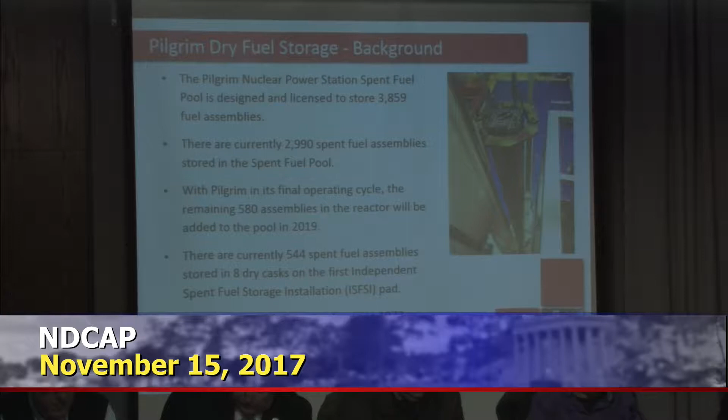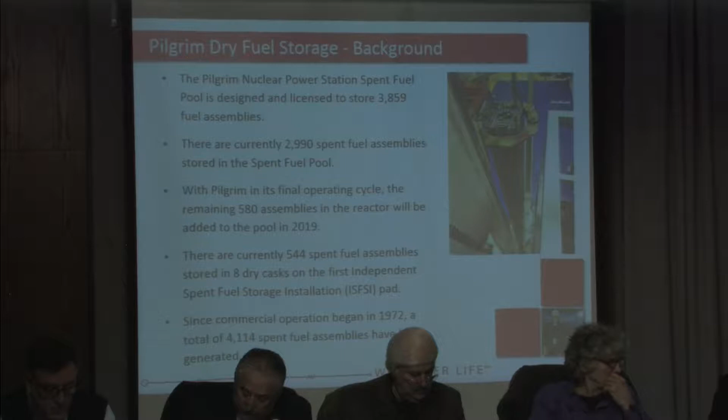We currently have 2,990 assemblies stored in the spent fuel pool, and about 580 assemblies right now in the reactor, which is operating in our last cycle. When we complete that cycle on or about the end of May 2019, we'll be adding another 580 fuel assemblies to the spent fuel pool.

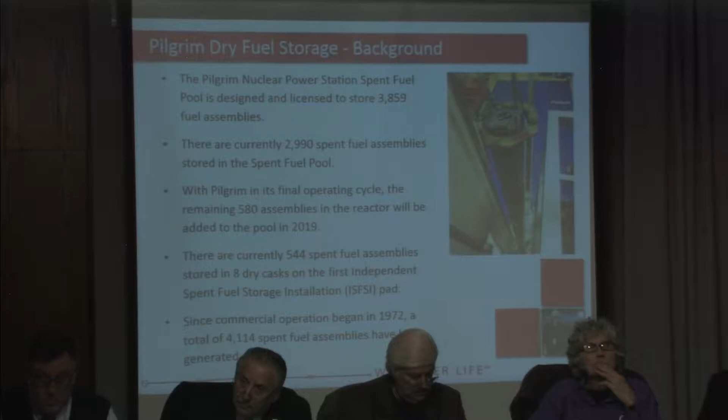Right now we have 544 spent fuel assemblies stored in 8 dry casks on the first of what will be 2 independent spent fuel storage installation pads. Since 1972, when we went commercial and started operating the plant, a total of 4,114 fuel assemblies would have been generated.

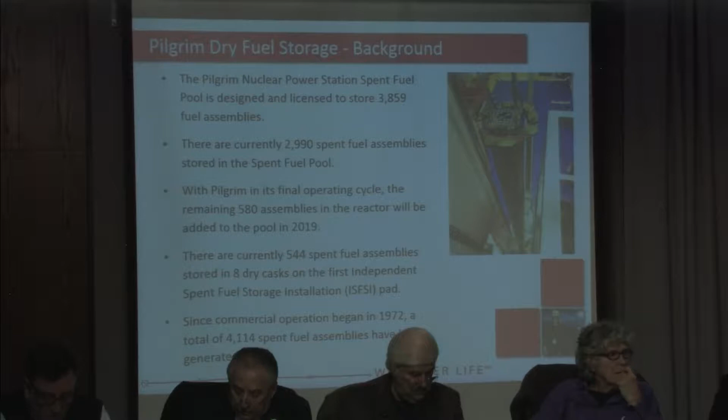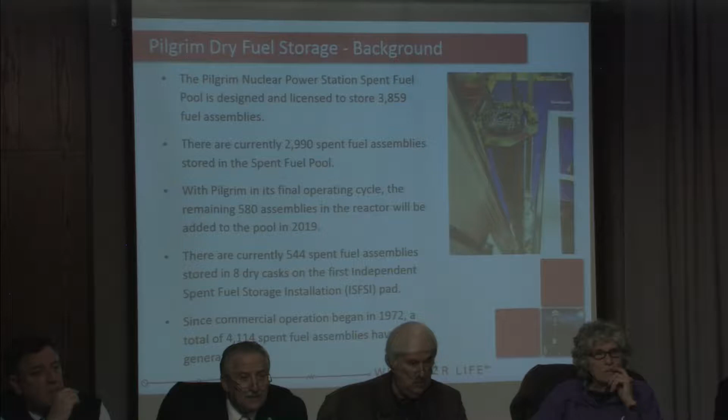Hold on one second. Justin, if you could hear me, can we get the other screen to go down? Or Kevin, maybe you can just try pulling and see if it works. I'm not sure it's on. Yeah, I don't know where that is. Can we do that one too? I was going to say, Kevin, you were going to have to sit on it. Go ahead, Joe. Thank you.

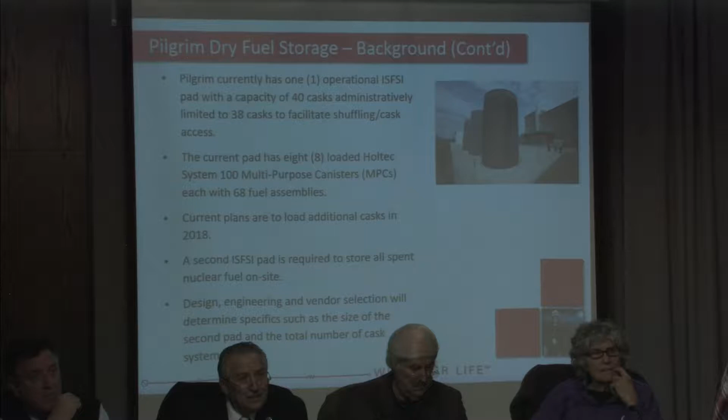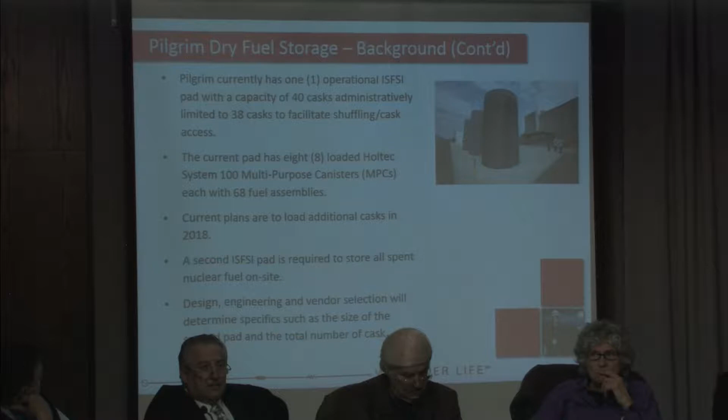Continuing with background information, as I mentioned, we currently have one operational ISFSI pad with a 40-cask design capability, but we'll administratively limit that to 38 because, as I mentioned at the last meeting, we need the ability to shuffle these around a bit to do inspections and things like that. The one pad we have constructed does have the 8 casks.

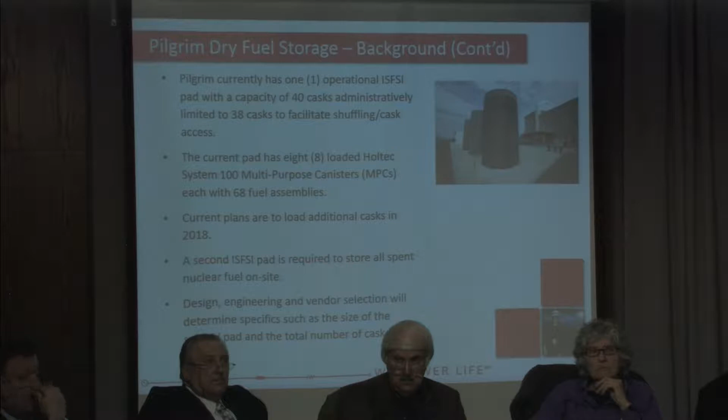These casks are designed and fabricated by Holtec, known as their System 100. It includes an inner canister which holds 68 fuel assemblies, and an outer overpack, or HI-STORM as they call it, which is the heavy concrete and steel shielding that goes around each cask. We plan to continue the loading campaign into 2018 and likely 2019 prior to shutting the plant down, but we don't have precise numbers yet - we're working on that right now.

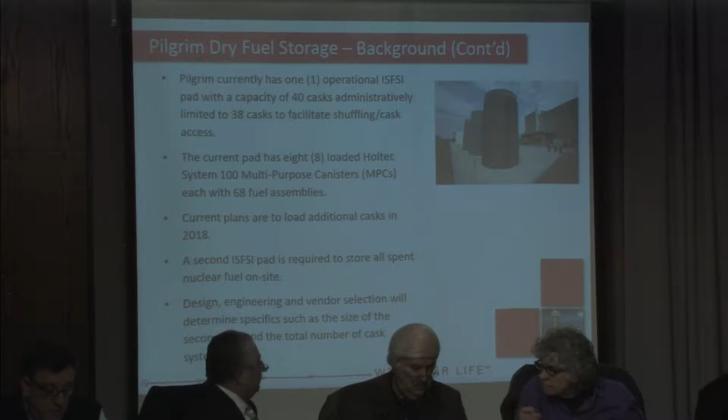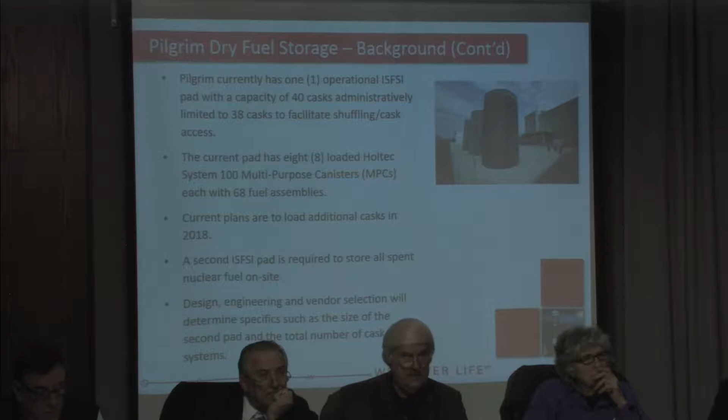Based on the numbers I've provided, it's obvious we're going to need a second ISFSI pad to store all the spent nuclear fuel on site. This involves design, engineering, and eventually a vendor selection that will determine the specifics on the size of the pad and the number of cask systems. Right now we're using the Holtec System 100, but since we'll likely need upwards of 50-something more casks, we'll be prudent and look to other vendors to see if there are more economies in a different design. But up to this point, it has been the Holtec system design.

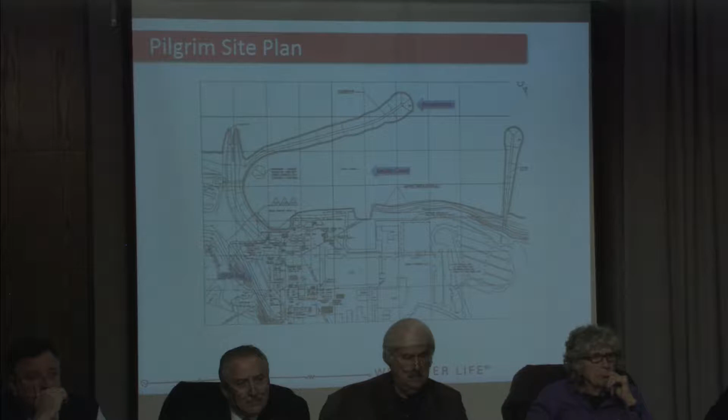The effort to site the second pad is an extraordinarily important project to the overall decommissioning. I mentioned in the introductory presentation at the first meeting that one of the major projects we're working on is the development of the post-shutdown decommissioning activities report. We have a working group focused on that. That report will focus on three things: a very detailed cost estimate, the overall plan and schedule for decommissioning, and a plan for what to do with spent fuel.

This is a requirement before the NRC. We have to submit an updated irradiated spent fuel management plan. In that plan, we need to address how we're going to store the fuel, when we're going to move it, what methods we're going to use, and there are different options.

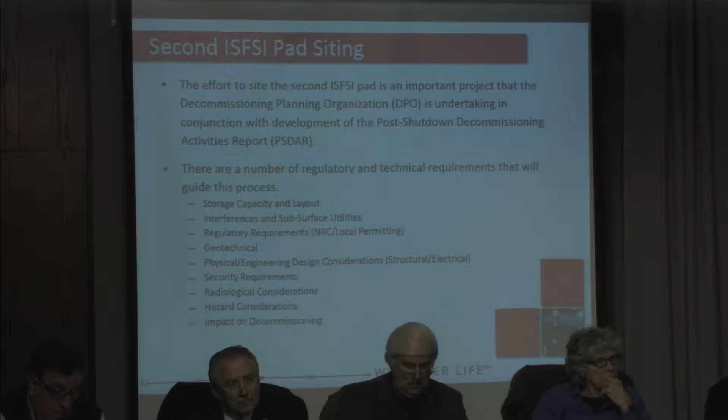Security requirements, radiological considerations—once this gets put in, we still have to meet NRC requirements relative to any radiation dose coming from this to members of the public. Hazards consideration and impact on decommissioning—and that last one matters because you can't just put it anywhere, since we also have to dismantle the plant once the dry fuel storage facility has been completely installed and all the fuel has been moved.

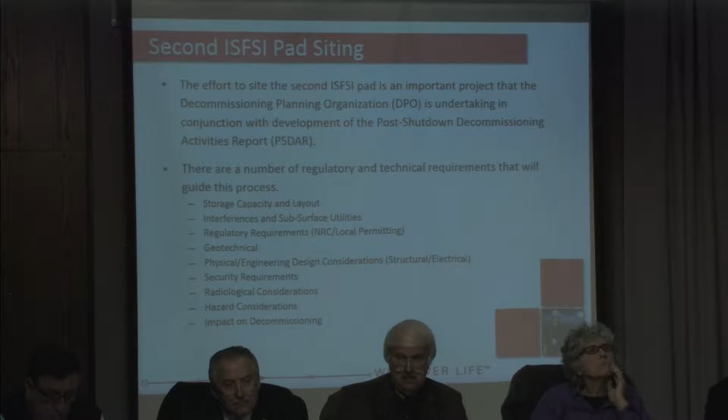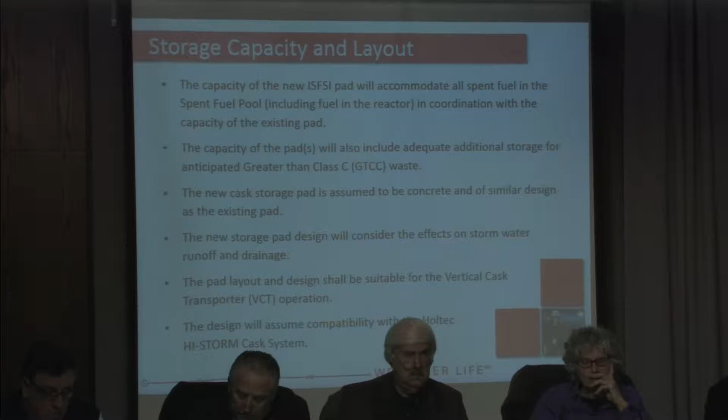So, stepping down each of these various regulatory or engineering challenges: the storage capacity and layout—the capacity of the new pad will accommodate all of the spent fuel in the spent fuel pool, including what's in the reactor right now, the 580 assemblies, in coordination with the existing pad. The existing pad can hold roughly 38 casks times 68, doing the math, around 2,000 fuel assemblies.

The capacity of the pad will also include additional storage spaces for what is known as greater than Class C waste. So when we take apart the reactor vessel itself, the metals right around the core, or what used to be the core, that metal is very activated. It has high enough radiation levels when the plant is shut down that it can't just be shipped anywhere. That's what is known as greater than Class C waste.

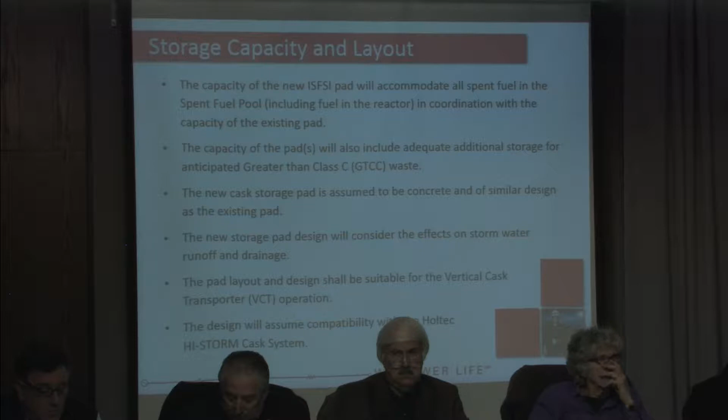I can tell you right now that the Yankee Rowe, Maine Yankee, and Connecticut Yankee plants store some of that waste in casks on their ISFSI pad, and that is allowed by NRC regulations. So we're at least going to make provisions for additional space on our pads in case we decide to cut up the reactor and leave some of that material in casks until we can ship it to a repository that takes greater than Class C waste.

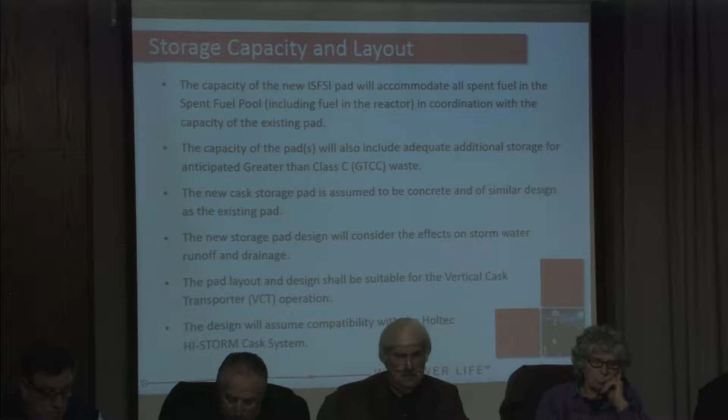We're going to assume that this is going to be a concrete pad, similar design. There's a lot of different designs out there, or at least a couple different ones, but Entergy as a fleet has used the pad with a vertical cask type design. It'll consider effects of stormwater runoff and drainage, and what I mean by that is the pad we have right now actually is sloped. On one end it's 25 and a half feet above sea level, on the other end it's 25, so any rain or runoff can go off the pad and not stay on it. That will be part of the design.

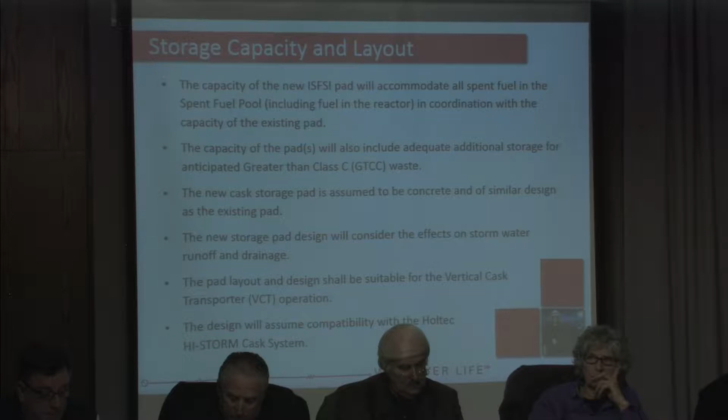The pad layout design shall be suitable for a vertical cask transporter. What the heck is that? Well, it's a very large device that has to move around these 173-ton casks. So we have to design this so that we could get this transporter to move the casks around, move it to the pad. So some of the locations that I think people have been talking about up on the hill, across the street, may not be physically possible given the equipment that is available to move these things around. There are massive concrete and steel structures that weigh a lot and have to be moved very slowly, so that will have to be taken into account.

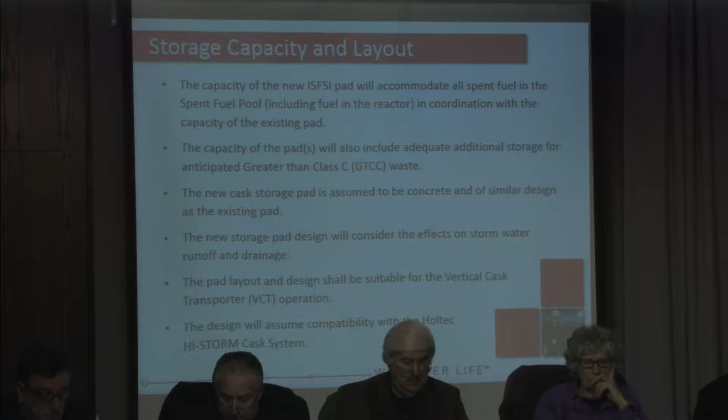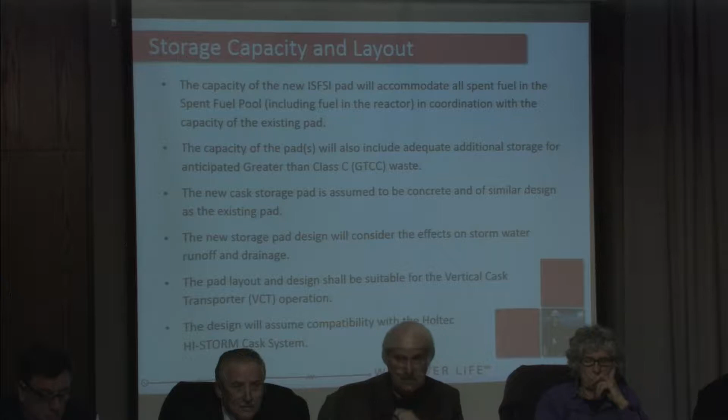And we'll just assume in the initial design phase that what we're going to design is compatible with the Holtec HI-STORM 100 system, since we know the design criteria of that. But as we select whether it's Holtec or somebody else in the future, we may be able to modify it, but we're going to do a most limiting case up front.

I talked a little about these interferences in subsurface utilities. So we're going to have to take into account all buried utilities. That'll include electrical, security cables, piping systems, leach fields, stormwater systems. Within the pad footprint and around that, they have to be evaluated for the design loads. This massive pad is many feet thick with lots of rebar, so it weighs a lot, and then you have all of these casks put on top of it.

One of the reasons I mentioned leach fields is that one of the locations that is being looked at is this upper elevation on the plant, which currently has a building. It actually has our septic plant as well, and that whole area is leach fields. So if we were to look at that, we would have to relocate the septic system at the plant. It's a pretty elaborate state permitted system.

We'll also consider the complexity and impact of relocating those underground commodities. So we may identify certain things, but some things we may not be able to move because we would have to take them out of service, and they're either supporting plant operations right now, or even when we shut down, they may be needed going into the future.

We'll customize the design to accommodate any of these things, so if we can work our way around them, obviously we will. And we actually have a preliminary survey of what all the electrical utilities look like underground, because we have a very good system of drawings. And what we'll do is likely use ground penetrating radar or some of the more recent techniques to make sure we know everything subsurface before we go forward with making a decision on the new pad location.

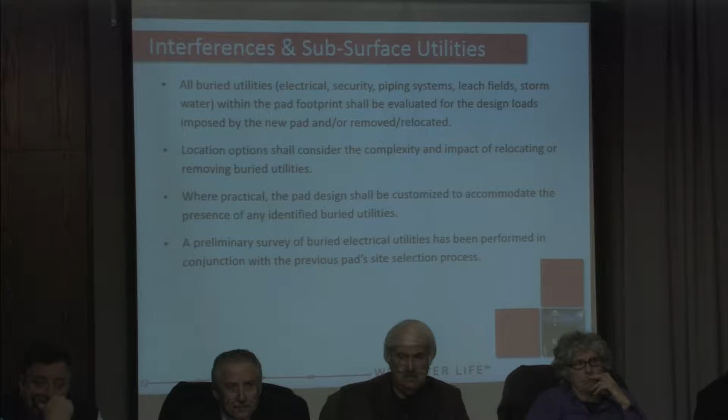Regulatory requirements, I can probably put you to sleep if I went over all of these, but these are very, very important regulatory requirements from the Nuclear Regulatory Commission. They're really broken down into just a couple sections. 10 CFR, Code of Federal Regulations, Part 72 has to do with the storage of fuel. They have a Subpart E entitled Siting Evaluation Factors, and then within there they have a number of chapters. I just picked out a few of them to give you a highlight of the type of things that we're going to have to consider.

Design basis external events, so flooding, earthquakes, tornadoes, hurricanes, those type of things. Design basis external man-made events, things like if we have storage tanks with gas or fuel, and we have to design around explosions and fires and things like that. So based on where we site this, we have to take into consideration what's being stored at the site right now. Geological and seismic characteristics, those all apply.

The seismic considerations that we have for our design will go into the pad as well. And then also how we get the fuel off the site. So they want you to take a look at where you're putting this, which also lends to the future transportation off-site of high-level radioactive waste material.

At Pilgrim, I would guess either by barge or by truck would be the options that we'd be looking at. In Vermont, for example, we have a rail spur, so that might be the most likely use. But that has to be taken into account, and the NRC regulations actually drive it.

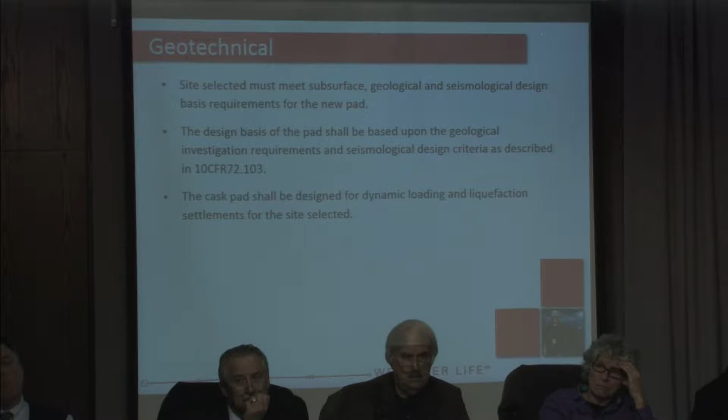So all of that has to be evaluated, and we do core bores. We have to evaluate the quality of the material. In many cases, we have to excavate a very large area and then put back in what they call engineered material that's designed to address this soil liquefaction. So in Vermont, we built the first pad. We built the second pad right next to it. We did some of the core bores, and they didn't come out exactly the way we thought they would. It took some additional engineering before we could demonstrate that the location of the second pad actually worked out very well from a seismic standpoint.

Engineering design considerations, pretty straightforward. Structural design has to meet the cask designer's requirement and what is known as their final safety analysis report. So these casks are licensed by the NRC. They come with a certificate of conformance. They also come with a final safety analysis report, everything about these casks. So we then have criteria that will then be used to design the pad and all of the systems around it. We also have to build it in accordance with a lot of the industry standards.

ACI is the concrete standard, so compressive strengths of materials, things like that all have to be factored in. And then the structural design has to take into account all kinds of loading combinations. It goes back to your seismic in combination with other events. Things that we do normally when we design anything at the plant, that all applies to these, something as simple as a concrete pad.

Electrical design, pretty simple stuff, but really important. The pad has to be grounded. We have to have adequate lighting because it is part of the security plan. One of the things that's required by the license is to do temperature monitoring, so we have to bring the systems out there to do monitoring. We monitor the temperature going into the cask and coming out of the cask. We measure the change in temperature, and it demonstrates there's nothing going on in the way of blockage, and that the cooling, which is natural circulation, is happening properly.

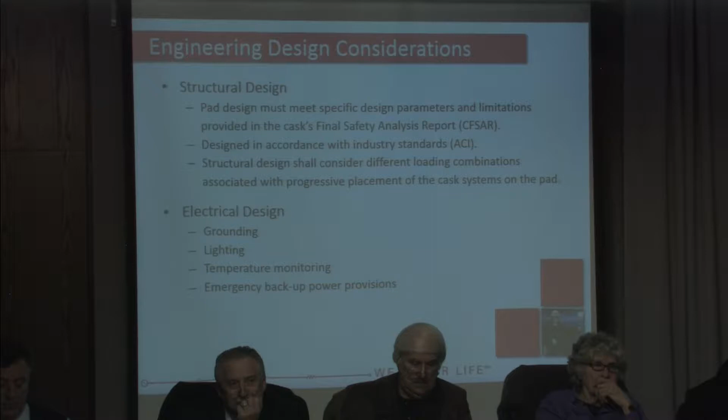If we were to move it outside of that, we would have to construct the same type of robust security barrier around any location. It would have to have monitoring, 24/7 security coverage. It would have to have all the requirements imposed by these regulations, and it would have to meet NRC criteria, inspections, things along those lines. So all that gets factored into wherever we're going to make the decision. Also, it determines certain things like minimum distances, where the fences have to go. All of that gets factored in and will be part of the design once we complete the siting study.

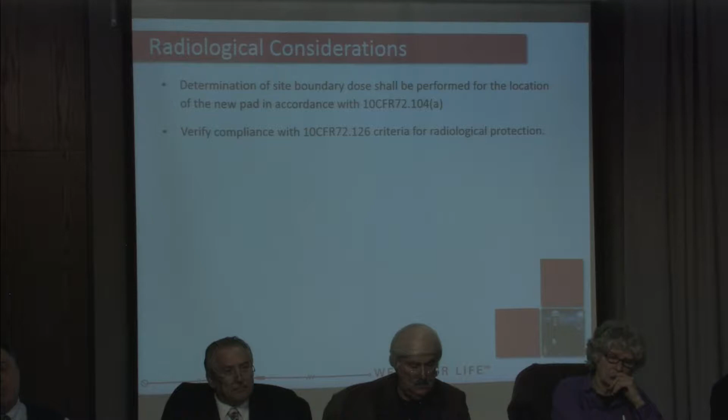Radiological considerations, it'll consider site boundary dose in accordance with some regulations, but it gets back to Part 20, which is part of our operation, is that any member of the public should be able to walk anywhere around the outside of the owner-controlled area of the site and not pick up more than that annual dose that's required by the NRC. Same thing would hold true here as part of the design of the first cask in combination with the second cask. Even if they're far apart or close together, we still have to make that determination. And then there are also radiation protection techniques that are factored in by NRC regulations.

Hazard considerations. So I spoke a little bit about fire and explosives, and that certainly is something that we have to take into account. Part of the cask design under NRC license requirements is they'll get a certificate of conformance, and it'll say what these things are designed to take. So they're designed to take certain natural events. They're designed to take things like explosives and all that, but there's going to be limits to that, and we certainly can't create a situation because of what we have on site right now that would introduce something like a fire or an explosion.

And some of the things we'll look at is where we're storing fuel, where we have transformers that have oil in them, and things as simple as forest fires. You wouldn't want to locate this in an area where a forest fire could get so close to the casks that it could cause a design issue or affect the ability to fight the fire or get to and protect the casks. Explosions, again, we have on-site gas storage, we have hydrogen and a few other things that we use as part of normal operations. Underground piping systems, and then storage of combustibles all have to be considered when you locate the pad.

The other hazard evaluations that we'll have to go through, again, part of them are listed in NRC regulations, have to do with natural events: flooding, earthquakes, tornadoes, hurricanes, and then the effects of things like tornadoes. So if tornadoes picked up materials and they get flying through the air, those are what is known as tornado missiles. They have to take the impact of the worst case tornado missile. So again, we have to locate this pad in an area where we can say that there's nothing stored on the site that can become airborne and become a missile and therefore cause damage to the cask. All of that would be factored into our design.

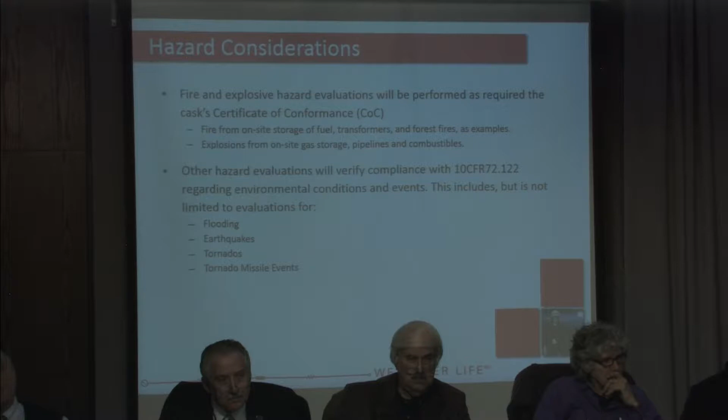So I wanted to spend just a little bit of time about flooding because I think it's been one of these topics where we've heard a lot of information about whether the existing cask storage system and pad is located properly relative to the potential for flooding. And obviously, if we understand a little bit more about that, it kind of sets the standard for the second one and hopefully alleviates some of the questions that are out there.

So first, the existing ISFSI pad is located at elevation 25 feet above mean sea level. I actually said earlier it's 25 feet 6 inches on one end and it slopes down to 25. So at the minimum, it's 25 feet above mean sea level. The pad's located about 300 feet from the closest shoreline.

Each Holtec HI-STORM 100 cask system, completely loaded and on the pad, weighs roughly 173 tons. And each of these casks are about 18 feet tall, 18 feet 3 inches, and about 11 feet in diameter. So that should give you just a little bit of an idea of the magnitude of how large these things are.

Some of the definitions that have been talked about: mean sea level, that's the average level of the ocean surface, calculated for all stages of the tide. And that's kind of what we use as our reference point. You'll hear us talk about 25 feet above mean sea level and surges and things like that.